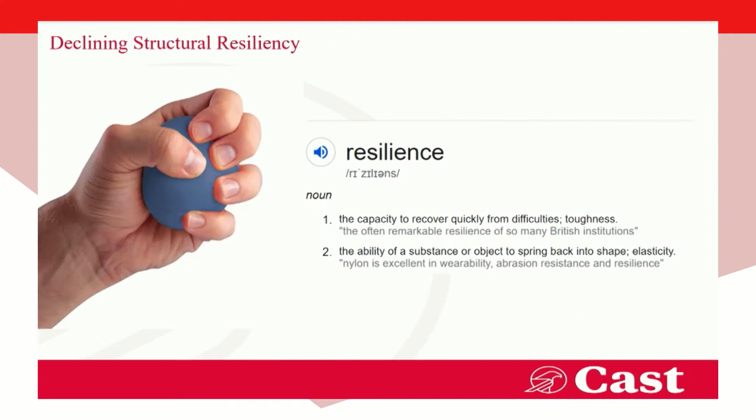Unfortunately, my conclusions from the report back in 2016 were that the industry's resiliency is actually declining, and declining in a structural way. So not a short-term feature, but something which is about a long-term pattern of the inability to bounce back and recover, particularly after each downturn in an economic cycle.

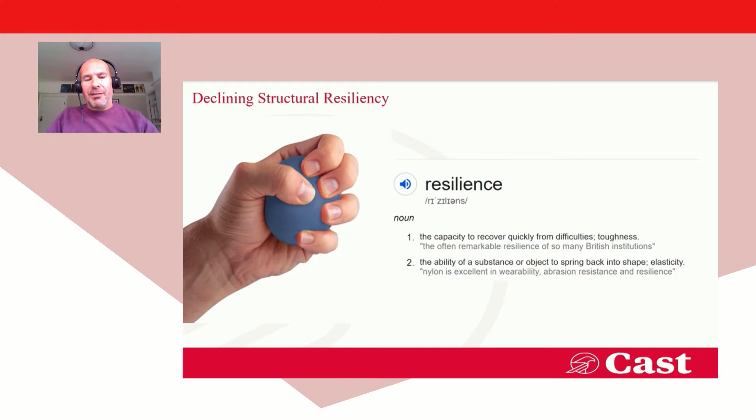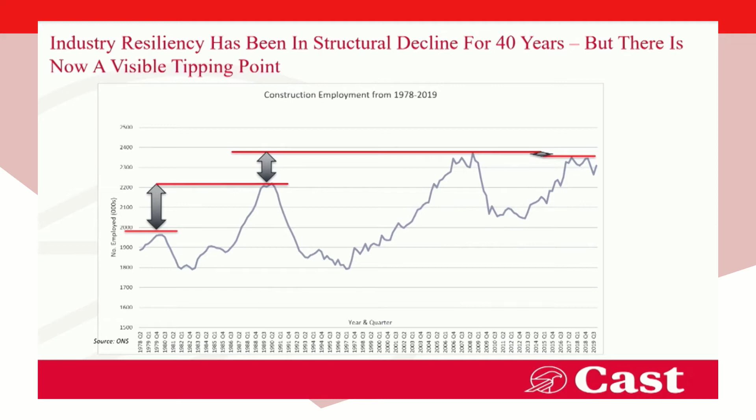The increase in construction employment in each cycle has got less and less since the early 1980s recession. In the peak period of the late 1980s, that increase in construction employment from under 2 million to 2.2 million was then diminished in the period from the late 1980s through to the global financial crisis in 2007, 2008. And then in turn, in the last cycle since the global financial crisis, construction never got back up to its peak employment position that it was at back in 2008.

That's a worrying sign, because what that's showing is that actually the industry is struggling to regain labour capacity when it goes through a growth period.

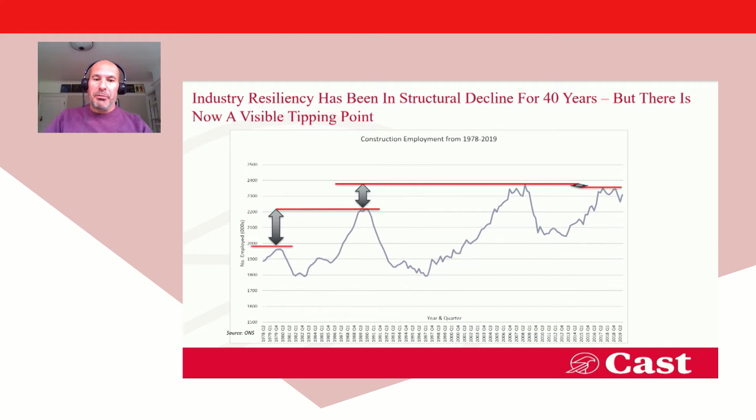What we've now got is a period where that risk has been further amplified by Brexit. We have an industry that is highly dependent on migrant labour, including EU nationals, both in terms of professional and technical staff, but trade operatives, both skilled and unskilled. Even in the last few weeks, we've had assertions from government that there will be no special dispensation for the likes of bricklayers and the like, where we have skill shortages.

So the government are clearly saying that the industry has to start sorting out its labour resourcing issues on a domestic basis, and actually in turn reduce the labour dependency it has by looking to innovate new techniques that involve less site labour for any given level of output.

On top of all of that, we've now got the COVID-19 situation, which has really thrust into the spotlight once more this site labour intensive model that we use in construction.

Back in March this year, we pretty much had a shutdown across all UK construction sites. We then started to open up those sites again, but clearly not being able to socially distance and creating public health issues and negative press, if you remember in the media. And then we got to a point where we worked out that there was a safe way of operating on construction sites, but it involved socially distancing, which in turn has led to a reduction in output.

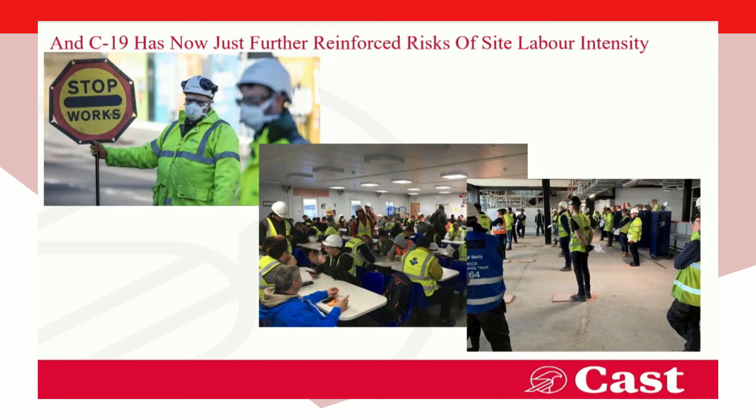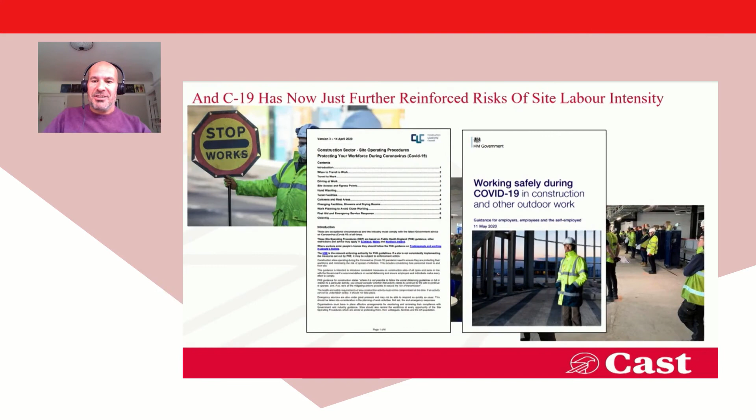There's a whole series of operating procedures that have been worked out with government and the Construction Leadership Council. Effectively, that has meant that we cannot produce the same amount of output from construction sites as we could pre-COVID, because there's less people involved on the construction sites. And none of this would be relevant if it wasn't for the fact that we have such poor productivity in construction. So what we're seeing now is added pressures on the industry to deliver against a backdrop of poor productivity, labour constraints in terms of access to resources, and now the likes of COVID further adding to that problem.

And these symptoms of failure that I started the presentation with are showing themselves now in a way perhaps that we haven't seen before, particularly in the residential sector where I work in housing and residential. And the fire sector, in my view, should be really concerned about what this means for traditional construction before we even get on to the issues of modern methods of construction.

And the headlines have been extensive over the last 4 to 5 years in particular, where we've had headline after headline talking about poor quality build in new build housing, whether it's house builders, whether it's housing associations, the headlines prevail. And many of those issues relate to fire related risks. So this all is a manifestation of these symptoms of failure.

We have an industry that has declining skills base. It's being asked to deliver more and more with either the same or less labour. There's issues around competency and skills, which I'll come back to shortly. And all of this is leading to more and more instances of failure.

And on top of that, we have this sort of behavioural challenge in our industry. Construction is notorious for its inability to commercially manage itself in many respects, and the whole market mechanism of supply and demand leads itself to some pretty poor behaviour around procurement. So clients asking for the cheapest price and wanting to exploit a situation when there's limited work to drive prices down. Even when times are good, the industry is very good at trying to pursue the race to the bottom, as it's called, and that ultimately drives quality. It drives outcomes. You get what you pay for is the maxim, and that's very much true in construction.

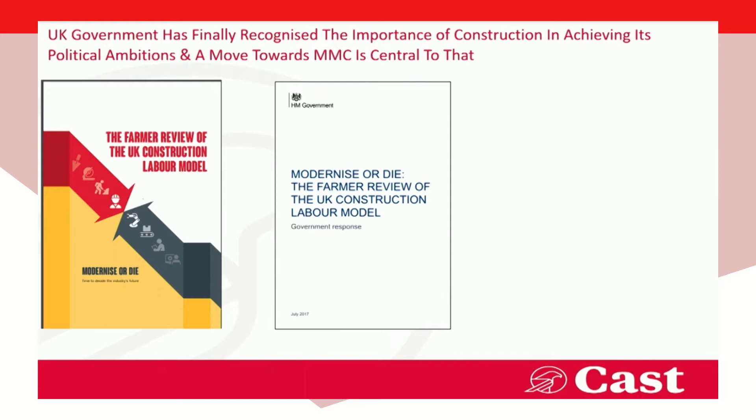So that was a bit of scene setting, and what I would say is that over the last 4 to 5 years, there's been probably an unprecedented period of UK government awareness building around the role of construction. My review back in 2016 perhaps set off a bit of a chain reaction in report writing, unfortunately, but all of these reports around housing policy, industrial strategy, the role of off-site manufacture, the role of government policy in driving MMC, the construction sector deal, which is part of the Industrial Strategy Challenge Fund, the recognition from government that we have to decarbonise our industry, and now the recovery from COVID.

All of these issues have led to a need to question how we build and actually look fundamentally at how we build in a different way. And I'd also say that this sort of government interest in construction is perhaps different from what I've seen in my career previously. And over the last 30 years, I've seen lots of attempts by government to stimulate construction activity. But I think there's now sort of wider issues, societal change and big picture change, which are forcing politicians to actually force the industry to think differently.

And that's really, in my mind, about quantity and quality. So there's been many cases in the past where we've driven quantity and we wanted to increase housing output, or we build more schools and hospitals, but quality has always been seen as a secondary element.

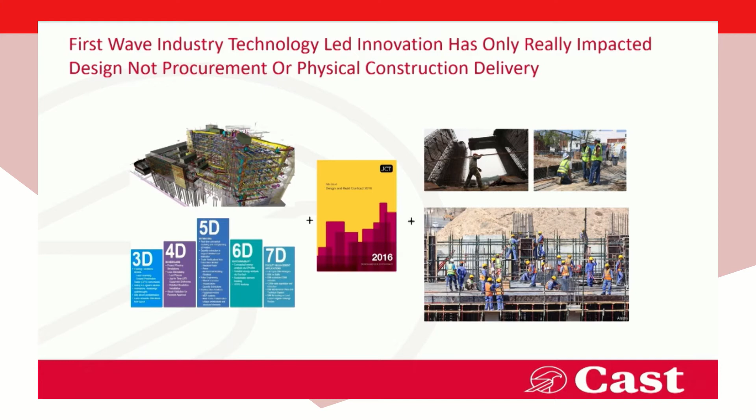It's back to lowest price. And then when we get to site, we insist on using these site labour intensive processes that involve lots of people doing things in an unstructured, analog way. So the digital thread that starts on the left does not make it to the right hand side.

So the risk of failing to deliver what we said we would in digital design is very high. People talk about the analogy of a faster horse versus a Ford Model T. The problem with our industry is that we actually have a horse towing a Ford Model T — a weird contradiction where we're only as strong as our weakest link. Our weakest link is that when we get to site, our processes are just analog, traditional processes that cannot be verified and assured.

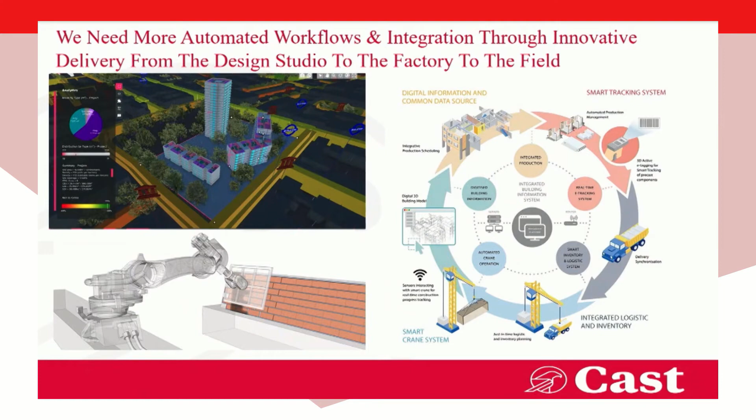And that's why, in my view, we have to move towards more automated working. We have to look at digital design linked to digital manufacturing, linked to a whole suite of digital tools on site that better assure the outcomes we're driving. And inherent in that is fire safety.

The whole debate about modernisation and MMC needs to start with defining what we mean by MMC. Last year I worked with the Ministry of Housing to come up with this definition, which I'd commend you all to look at, which defines 7 categories of MMC in the housing sector, ranging from modular, volumetric—category 1—through panelised systems, sub-assemblies, innovative materials, through to digital construction techniques on site. So when we talk about MMC, and when government talks about MMC in policy terms, it's not just modular housing or buildings we're talking about.

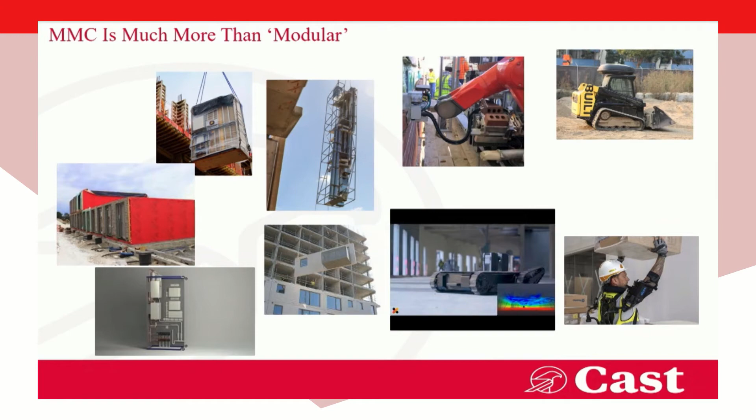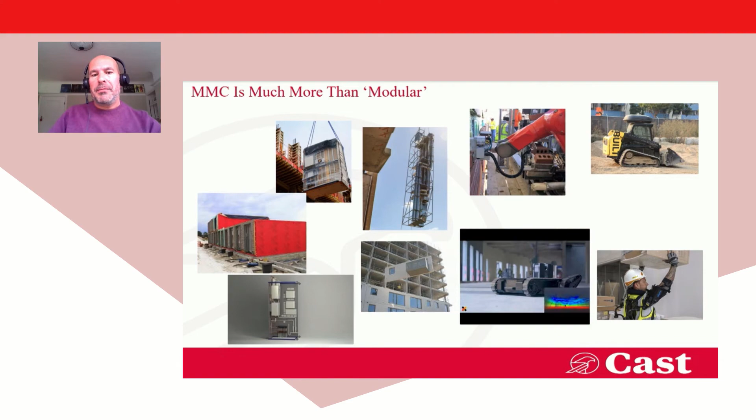We're talking about a whole suite of different techniques, and you can see some of them in those pictures, ranging from modules through to robotics on site, laser scanning, exoskeletons helping people lift stuff. There's a whole series of different approaches that MMC embraces, all with different implications around fire safety and risk, and MMC should not be badged just as modular, because it's a lot more than that.

Building an evidence base—using R&D and performance measurement to actually test how MMC is done—is a really important element of this.

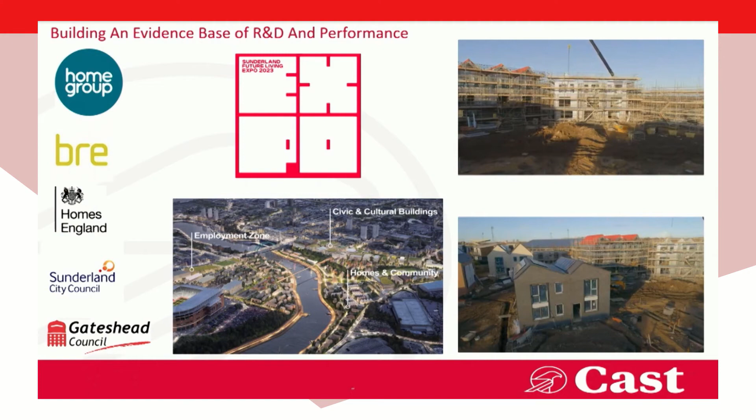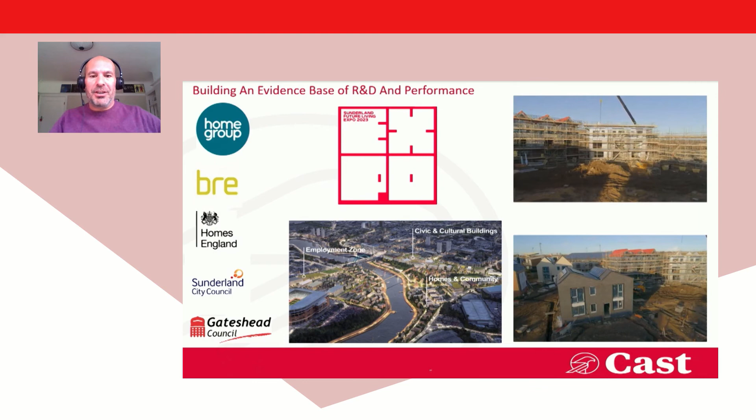Here are a couple of examples where demonstration projects have been commissioned. One here in Gateshead—the images on the right are from the Gateshead Innovation Village, where lots of different forms of MMC were built in the real world and now form an occupied development. And on the left, the Riverside scheme in Sunderland, which Sunderland City Council are trying to drive as an expo, again about demonstrating in the real world how MMC works. And that should inherently include performance in safety.

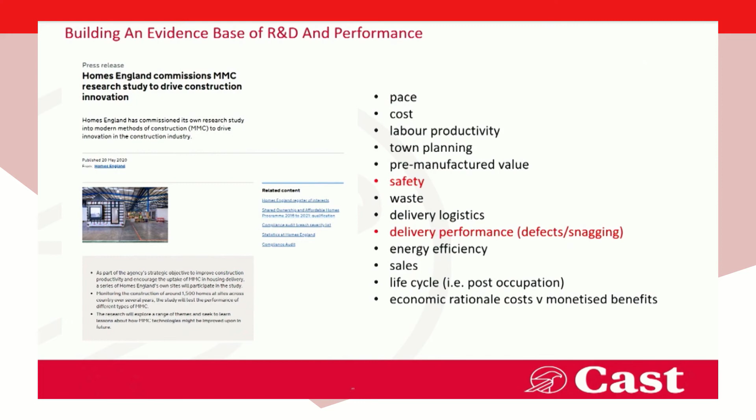Homes England are playing their part as well—they've embarked on a big R&D program across some of their sites, capturing all the criteria you see on the right, at least two of which are highly relevant to today's discussion around safety, quality, and delivery performance. If we can get this evidence base, we can build confidence in innovation, and start to overcome any concerns that we're baking in further failures in the future.

From a position of standards and technical accreditation of MMC, a lot of work has been done over the last period of time to drive that forward. I've been involved in trying to get the warranty providers, including NHBC, BLP, LABC and Premier Guarantee, to start collaborating on standards. That's led to an MOU being agreed between them in terms of all aligning on a common standard as to how they assess MMC.

I suppose my evolution on that is something I'd point you towards what's happened in New Zealand, where they've gone further and are actually moving the world of MMC into building regulations. There's a bill going through consultation called the Building Products and Methods Modular Components Amendment Bill, which allows properly accredited MMC to be fast-tracked because it's been factory signed off. This idea of quality planning, which we see in manufacturing sectors like automotive and aerospace, should be the way we drive the industry forward.

It needs insurers to demand this - these underwriters need to say we're not going to sign off unless you're deploying these kinds of approaches. The whole idea of MMC standards needs further collaboration, and I'm right in the heart of trying to help facilitate some of that. I'm trying to get everyone together on the same pitch to work out how we allay any concerns around fire safety in this world of innovation and off-site construction. We're early days, but I'm hopeful we can make good progress.